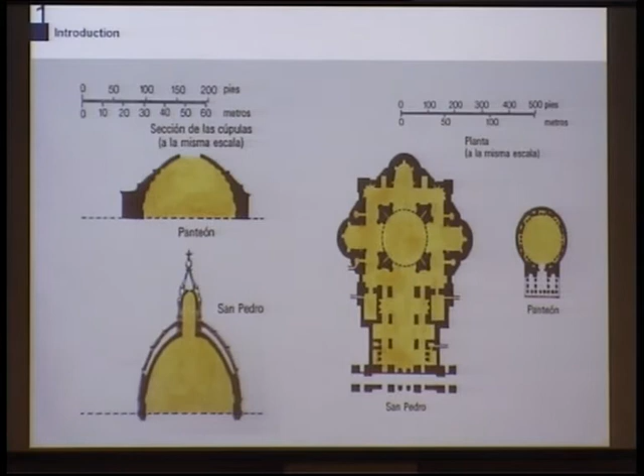Our first SOFiSTiK project was a bridge, a competition in 1989, more than 20 years ago. And we bought SOFiSTiK at that time because we wanted to take advantage of non-linear geometrical calculations, because you know that a bridge like this needs geometrical non-linear analysis. This was the reason why we started working with SOFiSTiK, but I will not tell you about that bridge. It happened many years ago, and now I will show more recent projects.

The first one: he died 2 years ago. He was Oscar Niemeyer, a very well-known architect from Brazil, and I met him when he was 101 years old.

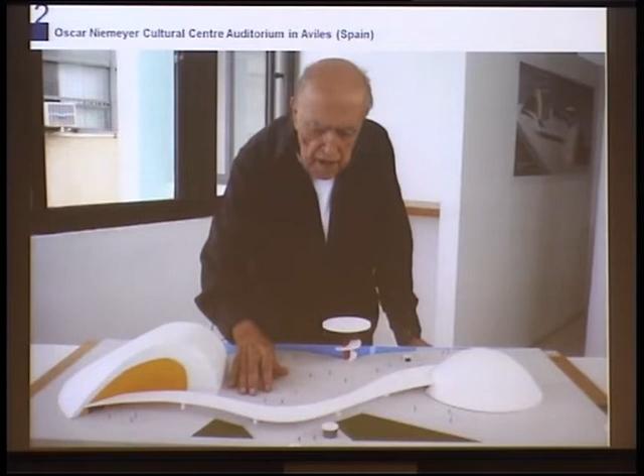I took that picture myself, and I was talking with him, and for me it was very interesting, the interview, the meeting we had, because he had passion to produce, to build, to design, and he had this project, and we were making the structural design of all these buildings.

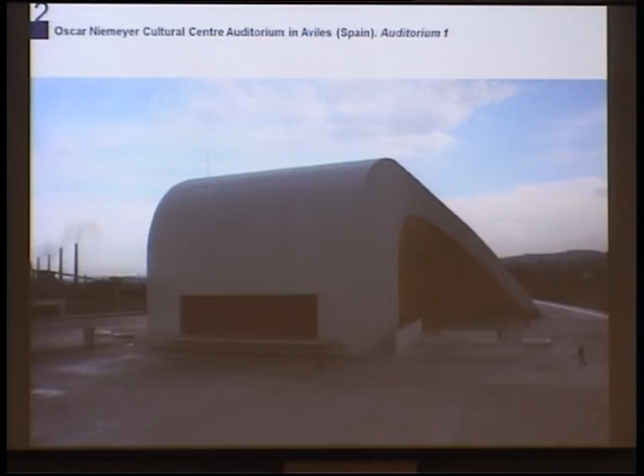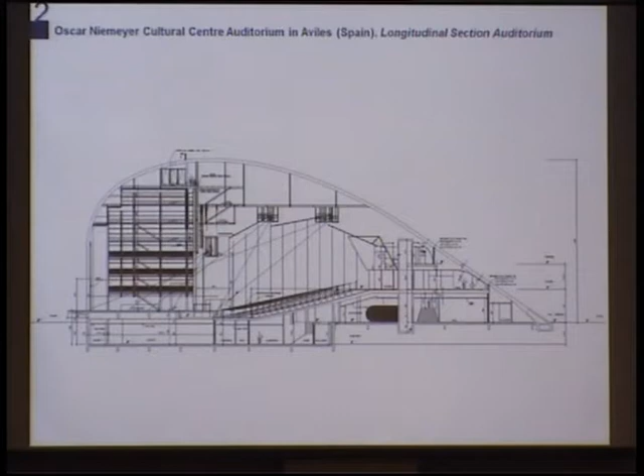Here you have a longitudinal section. I will give you some details, and this is a concrete. It's not a shell, but it is a concrete slab with a shape a little bit strange. And we made this model because we wanted to reproduce the different elements which were not so clear to see from the first contacts with the structure.

And you see we made this complicated model, representing all the different details. And I only want to say that at the end we had some estimations. The calculations we did in this case were linear in concrete, and you know that concrete cracks, and concrete has a non-linear behavior, and you need to pass from stresses or from forces into

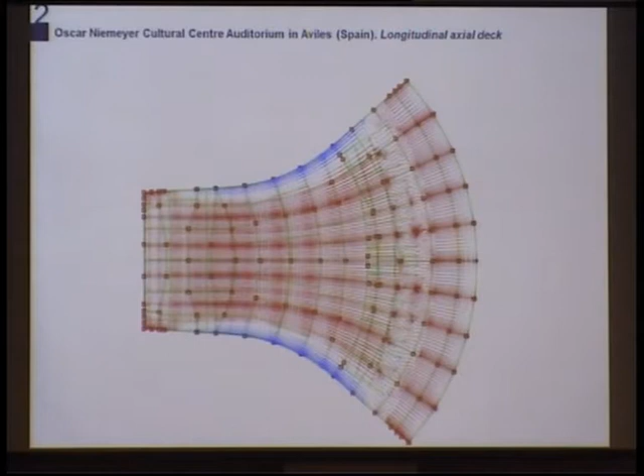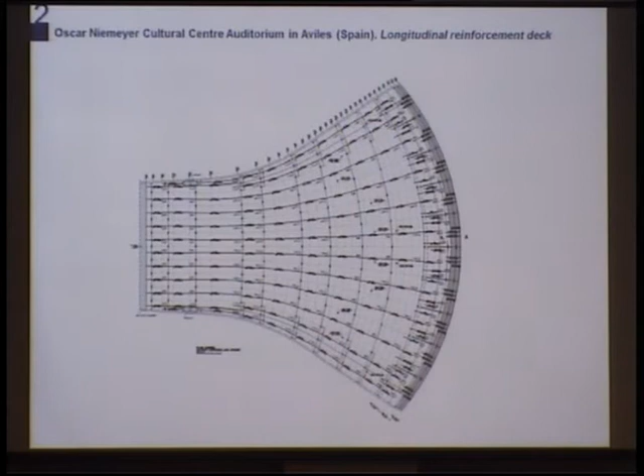reinforcement, and this is not so simple to do, and you have to really have a good way to get the information you can produce with a model like this, and to transform this information into design, into reinforcement, into all the different definitions you need. And here you have the final result, and we will talk about this transformation a little bit later.

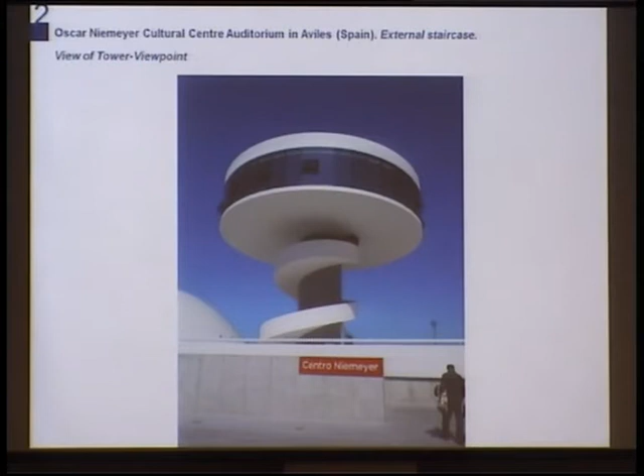And we used also SOFiSTiK for some other models. For example, this element, which is very interesting. Conceptually, it is very well known that this shape is very convenient, and you can take advantage of the shape in order to make good designs. But we wanted also to reproduce this special structure, and here you have the model again and the reality.

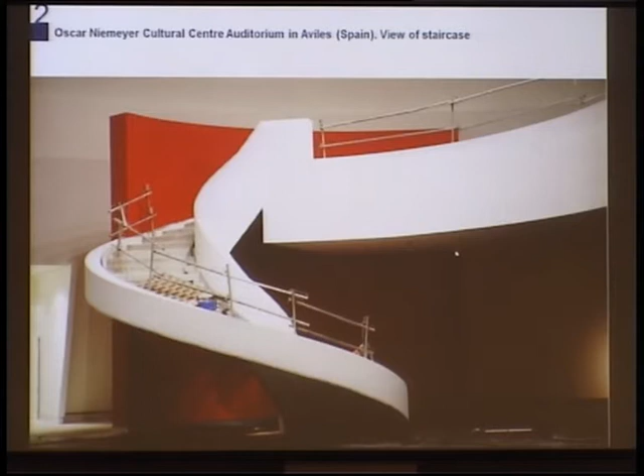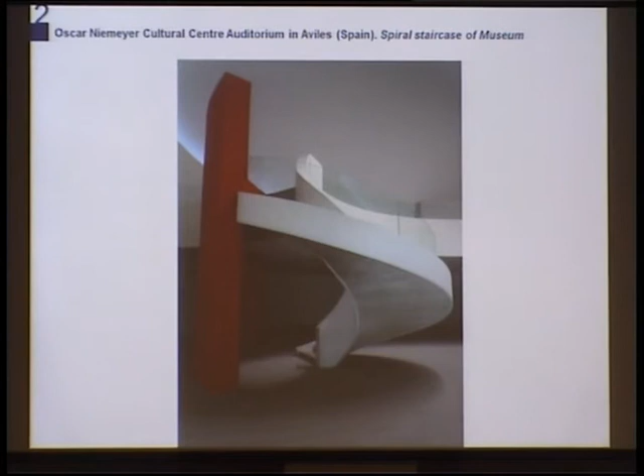Well, so you can use SOFiSTiK in concrete. Here you have another interesting structure. This one, yes, and it's more or less the same concept I showed before. And here you have the model we made in SOFiSTiK. So SOFiSTiK is a good instrument for concrete.

We don't use SOFiSTiK for every type of structure, but we use it for special cases in which we need to combine linear finite elements and shell elements, and we need to really reproduce complicated shapes. And the result is very good. You see, this is very important.

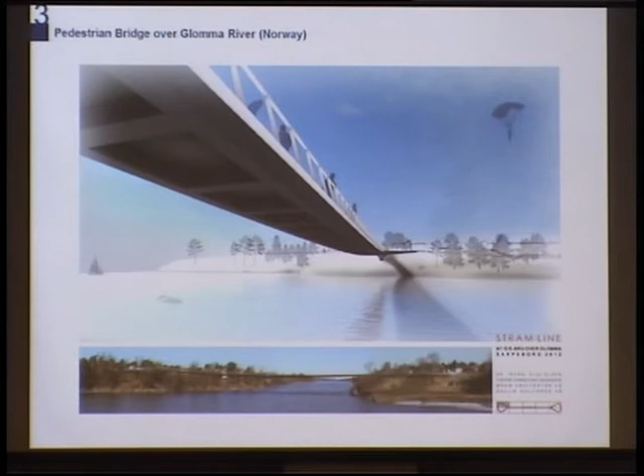This is another completely different problem. This is some information we presented in a competition in Norway. It was a competition for a pedestrian bridge to cross this river, and we won the competition. And these are the ideas we had for the competition. You see that it is a stress ribbon pedestrian bridge, and this was the idea we had.

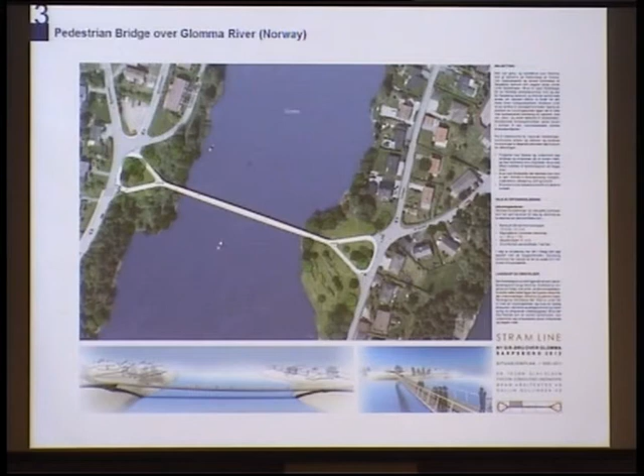But we made many other different proposals, but it is very important to understand well the information and the boundary conditions. And when I went to Norway to visit the place, I realized immediately that this type of solutions, the suspension pedestrian bridge or the arch proposal, were not very good for that pedestrian bridge. So we decided to develop this stress ribbon proposal, and we did that.

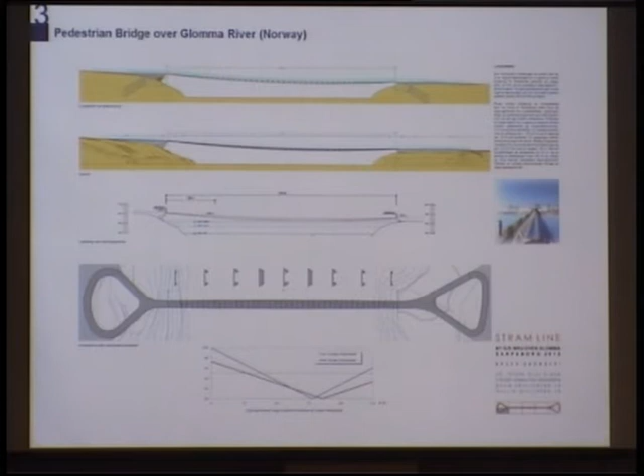The idea was at that time, you know, that if you have this type of structure, you have some problems with the slope for the users of the pedestrian bridge. So for that reason, and here you are not able to see, but you can guess that the depth of the stress ribbon is not constant, it is a little bit variable in order to minimize the impact of the slope. And fortunately, we won this competition.

You see here different pictures. And we needed to make the construction project. And in the construction project, as you probably know, you need to adjust many things, but the final proposal is not so different to the initial one. But we decided to adjust a little bit better the slope evolution of the layout of the stress ribbon proposal, and we decided to abandon the idea of variable depth, and we have now this proposal, which is more typical.

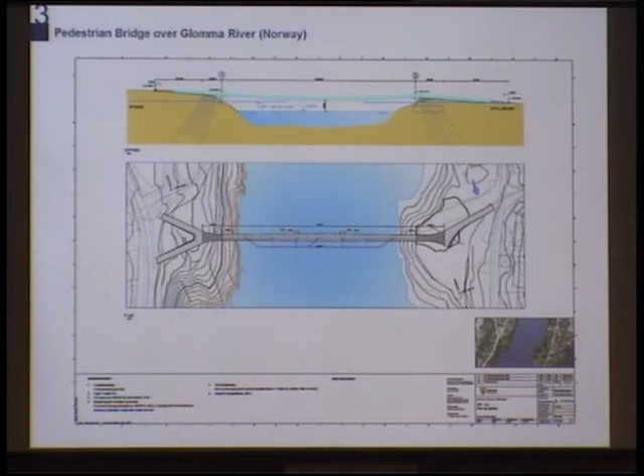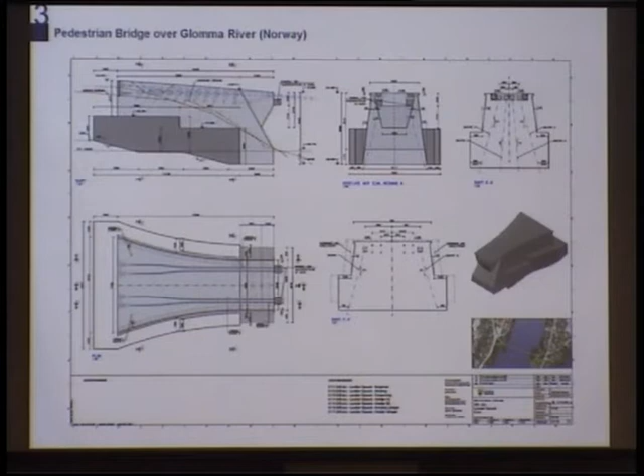So this is a very interesting structure. You need to anchor cables in the abutments, and here you have the definition of the abutments. The abutments are very important elements because you have to get all the forces there. And here you have one abutment, which is anchored to the rock we have in this area, in this area, yes.

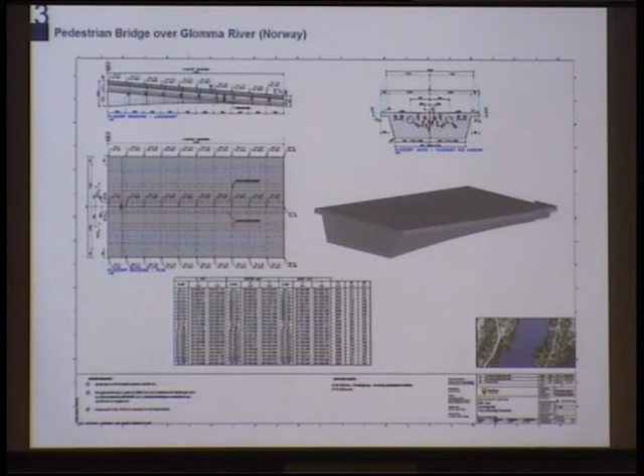And here you have some details. You need to accommodate all the anchor blocks for the anchor elements. And then the first part of the stress ribbon is a little bit thicker.

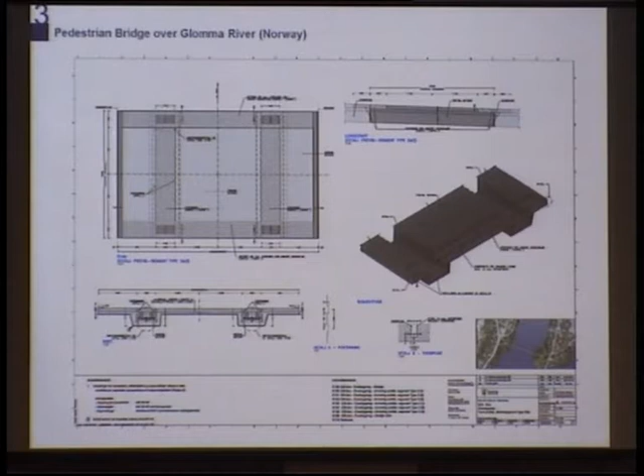And then you have these elements which are constant depth, and you need to install first some cables, the bearing cables, and then you need to install the segments, and then you need to cast these ribs, and then you can pre-stress some additional cables. And this is a very non-linear problem, geometrically non-linear and mechanically non-linear. So from the beginning, we decided to use SOFiSTiK.

And well, I like to show this because after making interesting calculations, you have to produce very good details. And here, this is a local detail of the segments. Here you have the bearing cables you install before the segments, and here you have the pre-stressing cables you pre-stress after casting this part of the segments.

So the construction process is very difficult because you need to build the abutments as indicated in these two steps. And then you need to install the cable with a good geometry, because then you are not allowed to move or to increase forces in cables. And then you install the segments and you produce a big deformation in the cable.

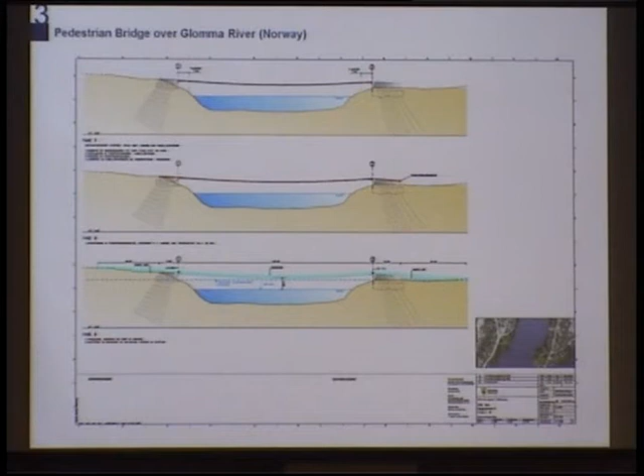You make the continuity between the precast segments and the cables, and then you pre-stress with the second system of cables, and with this pre-stressing you can elevate all the structure. And then you have losses in the pre-stressing, so you have some new deformations, and the temperature, which makes the elongation of this element, and then to take into account the ultimate state, the only elements active are the cables. So here is a summary of the calculation. The model is not so complicated, but the concept is very complicated.

Okay. Now it's better? It's not better? Yes.

Yes. Well, here you see the model. It's simple, and you can see also the forces. I will not explain in detail all these forces. I only want to give you an impression about the model we were using. So the model at first is a cable. You can do that easily by hand to estimate the deformation.

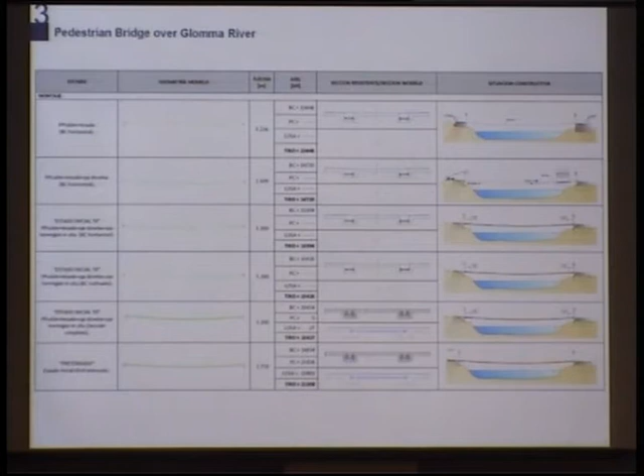But here you see the deformation is very small, 20 centimeters, because here you have only the weight of the bearing cables together with the pre-stressing forces, and the pre-stressing forces are very high, 10,000 kilonewtons. And then you install the precast elements, and you again have the same model, the cable, and due to that load the deformation of the cable will increase up to 2 meters and 70 centimeters. This is a non-linear behavior, but again easy to follow by hand.

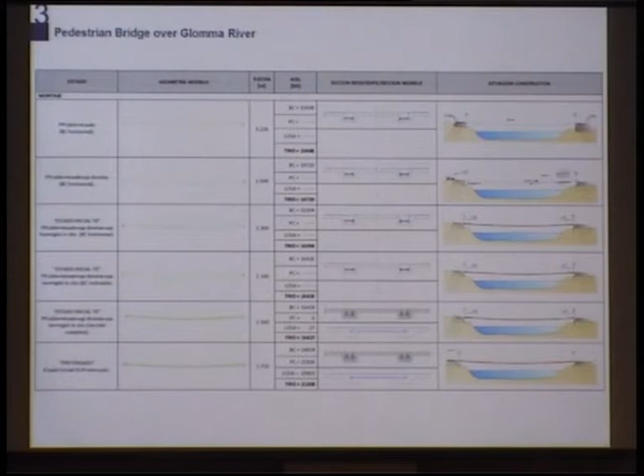And then you cast this part to give a monolithic behavior to the bridge, and you increase the deformation a little bit more, up to 3.3 meters. But when you have the concrete with enough strength, you can introduce the pre-stressing. And this is not so easy to represent with the model, because you have to make some assumptions, and you need to change from a model with cables to another model with a completely different stiffness, because the stiffness in this second situation is that of the whole concrete cross-section.

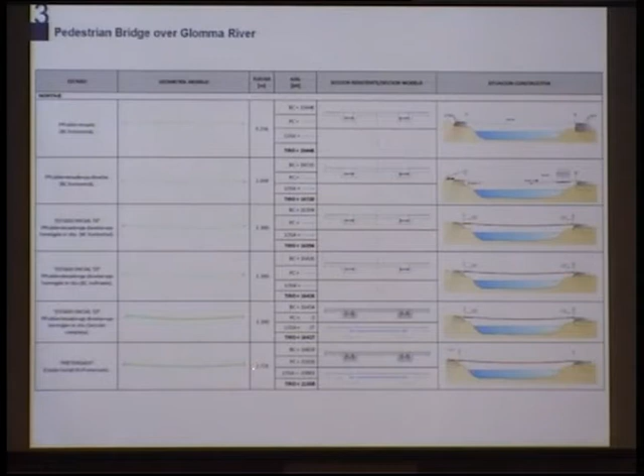So to do that, you need to create a new model, and you need to pre-stress that new model in order to obtain the same deformation. You see here two different models, but the deformation is exactly the same. So you start from the same situation, but with a different stiffness. And then you can work with this second model, in which you introduce the pre-stressing, so you elevate the bridge from 3.3 meters to 2 meters 70 centimeters.

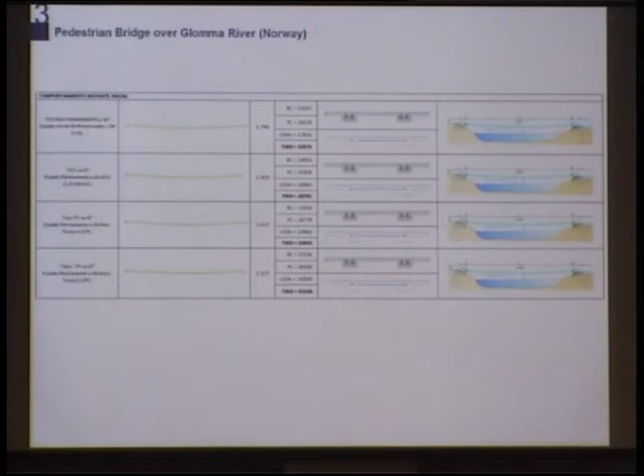And then you need to take into account the losses, and when you have losses, you diminish the forces, and this situation increases the deformation. And also, if you have heating due to the temperature, you increase the length of the pedestrian bridge, and you see that the movement is very important, practically 80 centimeters from the hotter situation to the cooler situation. So you have an interesting movement.

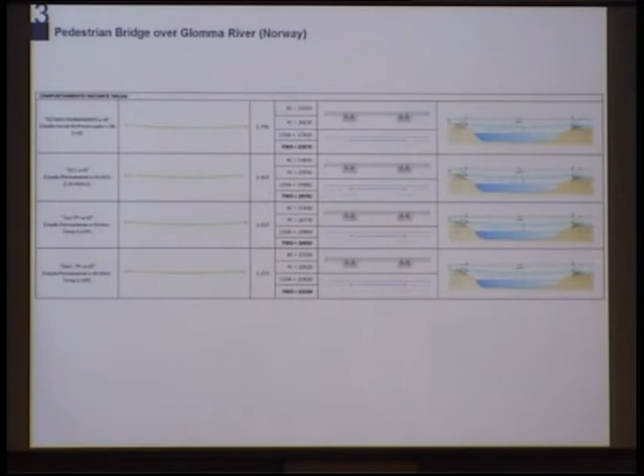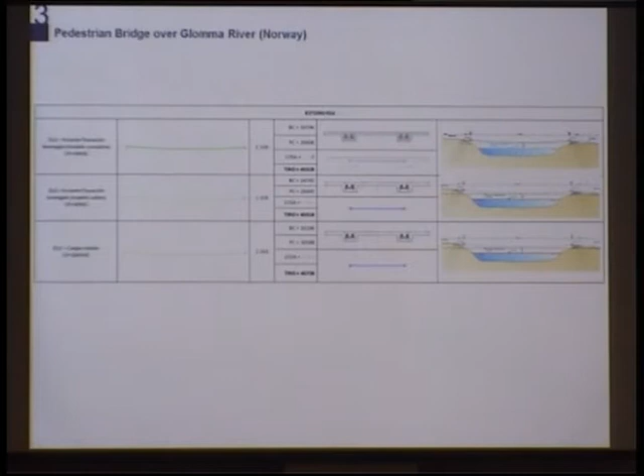And then you have the ultimate limit state, in which you no longer have the contribution of concrete. You have only the steel, and you need to change the model again to take that situation into account. So in order to use a very interesting and powerful program like SOFiSTiK, you need to know well the final result of your model. This is very important. You need to make a big effort to understand. Understanding is the most important, more than having a big model, a nice model, plenty of colors. To understand is the key aspect to really take advantage of a program like SOFiSTiK.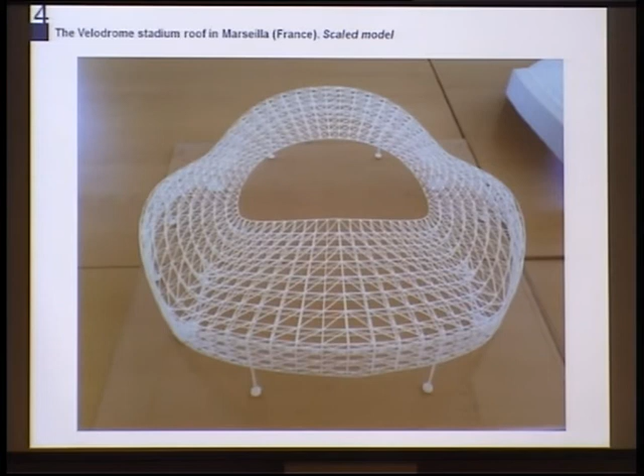I will show you a picture I took personally two weeks ago. The idea was made by architects. We were not able to work with them together to improve and take advantage of the shape, to minimize and optimize the behavior of the structure. But our client is the constructor, and we needed to make a new proposal to optimize the quantities.

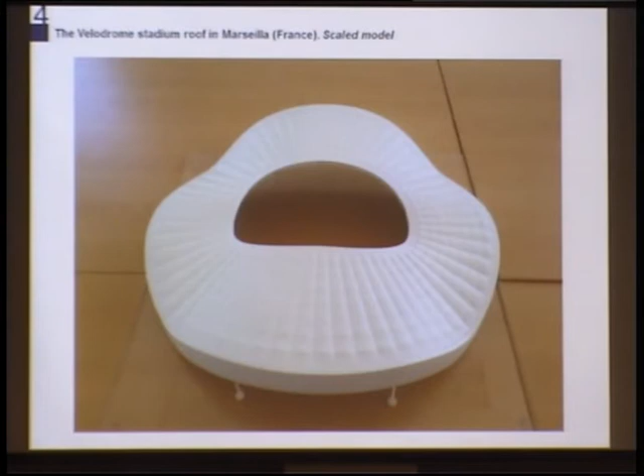So we had ideas first, and then we needed to study carefully the nodes, because according to the codes, the Eurocode, you can make a simplified calculation for a joint like this, made with tubes. But when you use very thin tubes, you could have buckling problems, and in those cases you need to make buckling calculations.

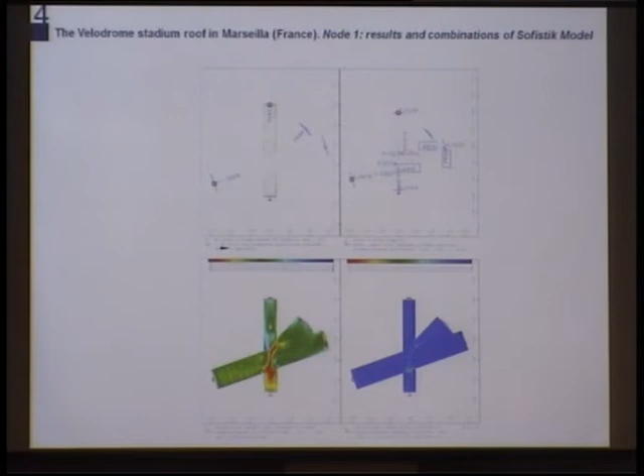We made that type of calculation with SOFiSTiK. You see here the model and the results. We were first making many manual calculations, and then when we had the order of magnitude of the problem, we started using SOFiSTiK to see carefully the details. But it is very important to know the order of magnitude of the results.

Here you have another view of the model and the results, and here you see the reality. Reality is very important. You don't have any more models, you have reality. And this is reality, and another completely different view. If you are really close to the site, you see that models are instruments.

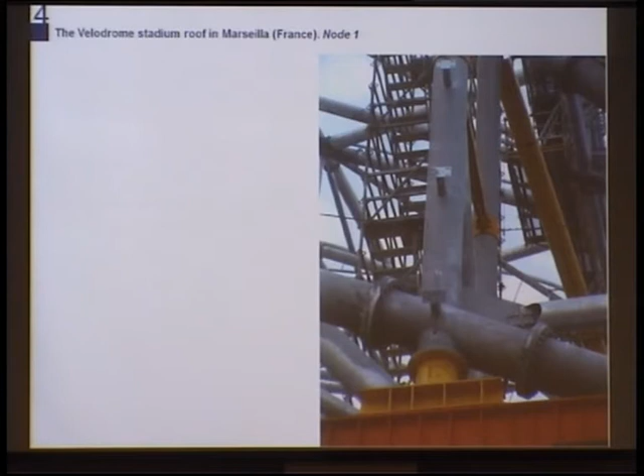But at the end, you have all the responsibility. This roof has a diameter of 250 meters. It's not a small structure. So you need to be sure, and you need to use these tools in a very good way. You need to take advantage of the tools, but at the same time you need not to forget that you are an engineer. You are obliged to understand.

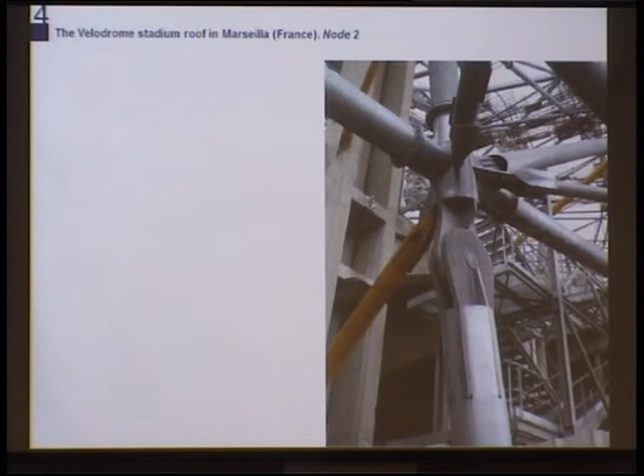It's a very, very complex structure, I can say you. I was suffering for more than one year. It's almost finished now, and you smile, but during the process the system is completely different. I would like to show you that these are all the calculations made by hand, and then there were the estimations. We had first all these estimations before starting working with the model.

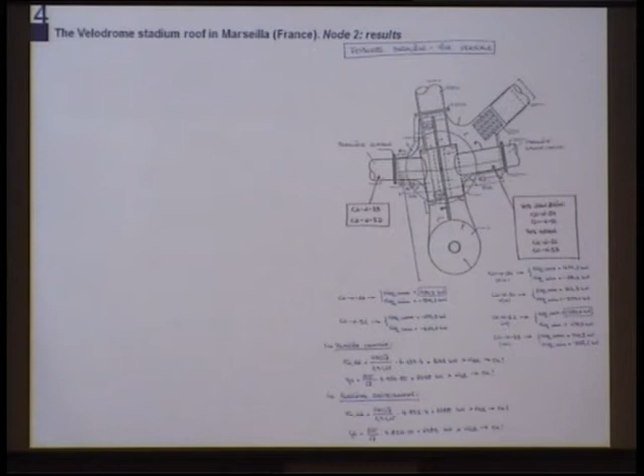Here you have the model again, and again. I like very much to make these hand calculations, and the model again, and reality. And reality is complex, a very, very complex structure. SOFiSTiK was very useful to analyze this special problem, buckling, local buckling, and allowed us to save a lot of money because we were able to use very thin tubes to solve this complex problem.

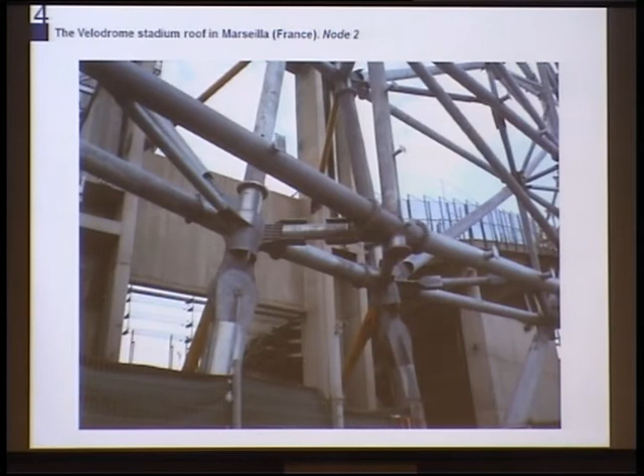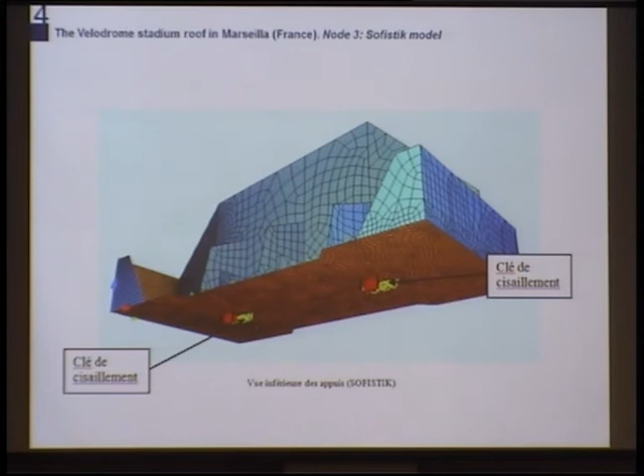So this is another example. You see the scale of the details, to give you one idea. I will pass quickly because I want to have time to show you the star of our project with SOFiSTiK.

Well, there was another complication because we needed to build this roof while at the same time they were using the field every 15 days. We needed to prepare a report to say you are able to play the next game here.

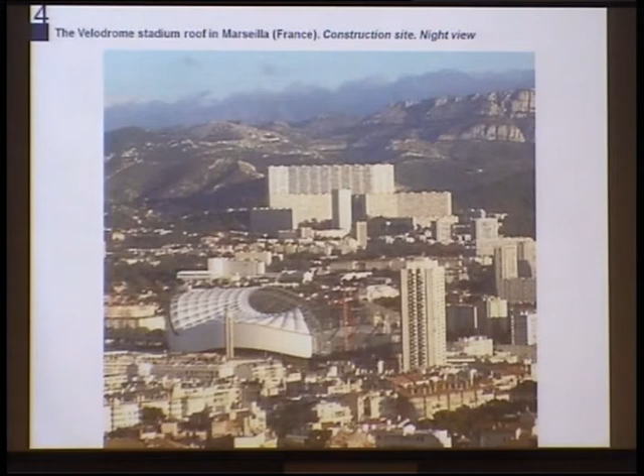This picture was taken by myself two weeks ago in Marseille. So we are practically at the end. Now we are very happy, we can smile, but you suffer a lot when you do things like that.

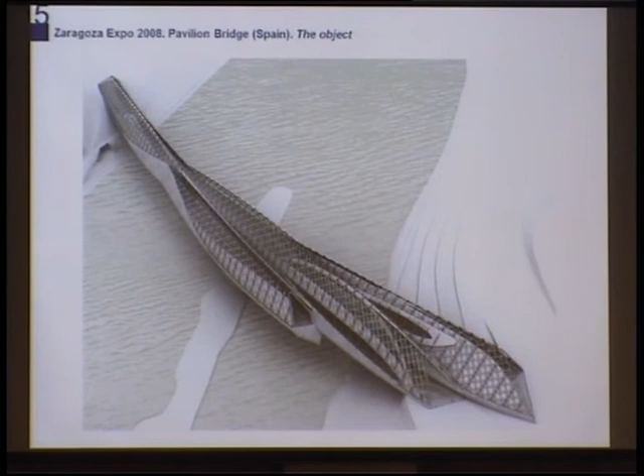I would like to finish my presentation with this last project. This was an interesting structure: it's a pedestrian bridge, but at the same time it's a building because it's an exposition area. So you enter, you cross the river, and you can see some exhibitions here. This was built in Zaragoza, in my country, in 2008.

The winner of this competition was a very well-known architect, Zaha Hadid, and this was her idea. She is a very good architect, but a very difficult one. You see the definition of the bridge was this one, we had only that definition. Many cross-sections coming from Rhino.

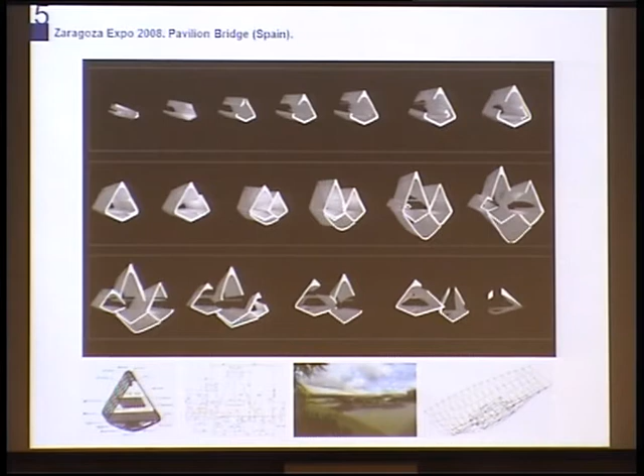Rhino is a 3D CAD program, and they can do everything with Rhino, but then you need to make this structure possible. Here you have another picture of the model. We participated in that competition too, and this was our proposal.

Unfortunately, we lost. But it is very interesting to lose, because in many occasions when you lose, you learn, and if you learn, you have opportunities for the next one. So this one was our proposal. I will not explain it in detail.

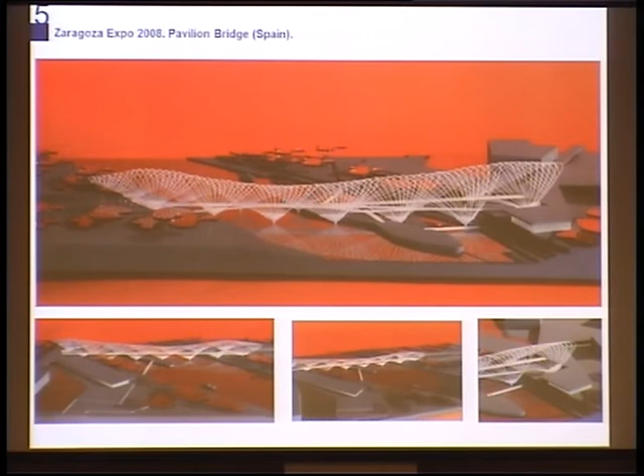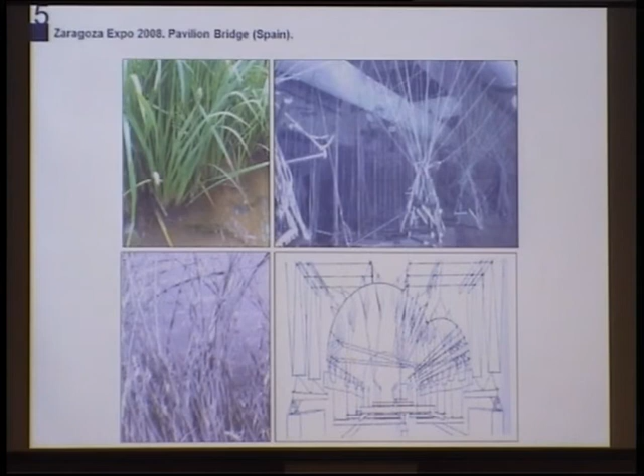We worked with Richard Rogers, and we had some initial ideas from classical buildings and structural ideas. I will not explain in detail, but at the end we made a proposal and Zaha won. We had our second opportunity because there was another competition for the construction of the building, and we had the opportunity to improve the structural design.

During that competition, the construction competition, I was practically one month thinking about the behavior of this very strange structure. So I made all these sketches.

I have a blue notebook, not this one. I have this one, and I made all my calculations here. I like to do all my calculations here. It's square, because engineers are a little bit square. It's blue, because we can make elegant. And it has some movement, because we are thinking all the time.

So many good ideas behind the notebook. Well, I started thinking what to make possible this strange structure. And I thought, well, this is a beam, a very strange beam with two spans, 125 meters one, and 150 the other one. And you can think that the behavior is like this.

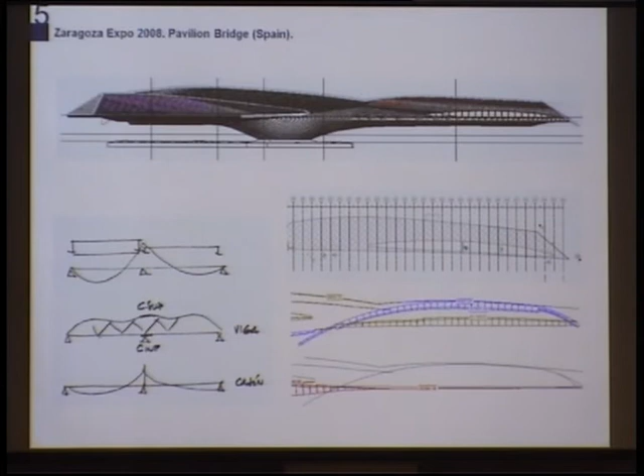And I thought, well, we have some elements on the top of the building, and I will use this as structural, and I will also use this mesh to pass the shear forces from the bottom chord to the top chord. And well, we started working in this direction.

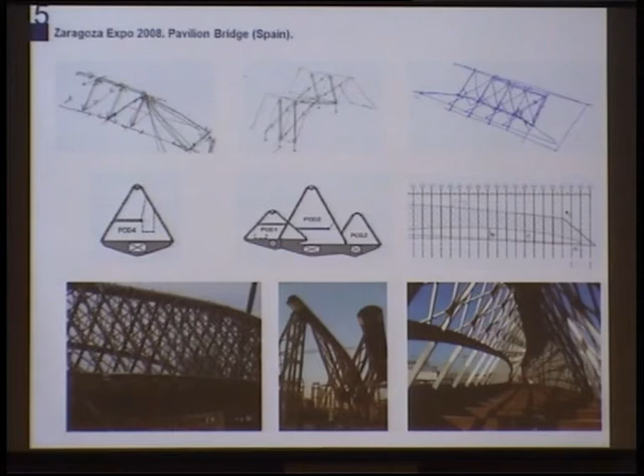And you see that every single idea was checked with the strut and tie models, in order to represent this very complex structure. So we needed to use again SOFiSTiK, because SOFiSTiK is our program for very difficult problems, I can say.

So you see here we have this bottom box, steel box, and then we have this top chords, and we have this connection between the top chord and the bottom chord, and we made many different models. Here you have the model we did with SOFiSTiK.

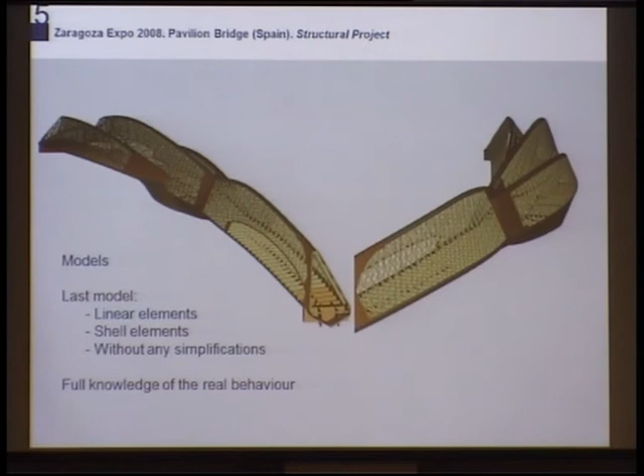It was very realistic, but the model was done after understanding the problem. It's very important to understand the problem with simple calculations. Otherwise you don't have any control. We like also to make calculation, we do simple calculations, we understand the flow of forces, and this is very important. When you know the flow of forces, at the end you know more or less the order of magnitude.

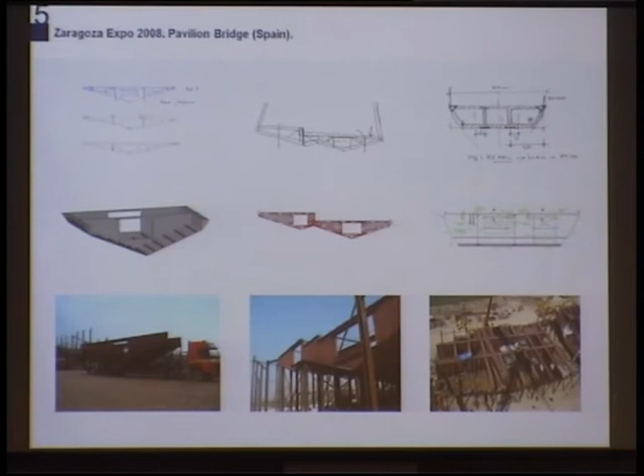And then you can check with more sophisticated models, and you have reality again. You need to do things to reach this level. And here you have the model we needed to reproduce.

It was not, we were not able to reproduce all the details. We needed to make previous models in order to see how to simplify the general model.

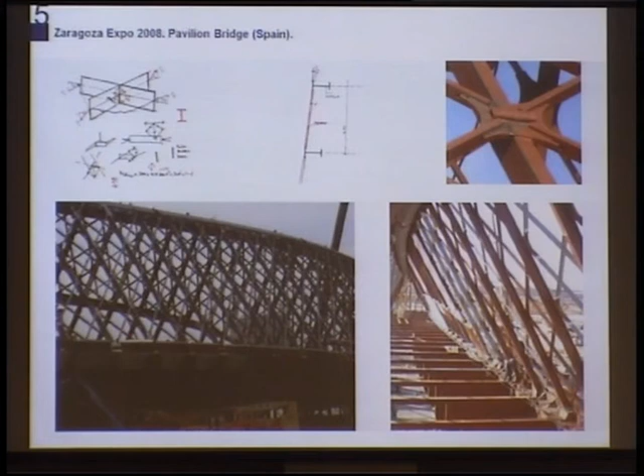I want to make clear that before the models, we need ideas. Ideas are very important, and well, this is a very good example. We started with the ideas, and then we made a 2D proposal, and then we started checking these 2D proposals with 3D because the problem was so complex. It is not possible to imagine that you are making a good assumption only with one node, and then we needed to produce our proposal and then reality.

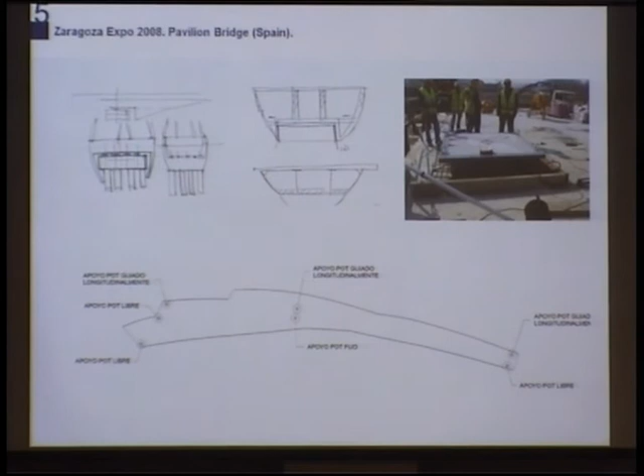And we made many different small models in order to understand the behavior of these nodes well. And at the end, these are from my notebook, not this one, because I have a lot, but the books I had in 2007.

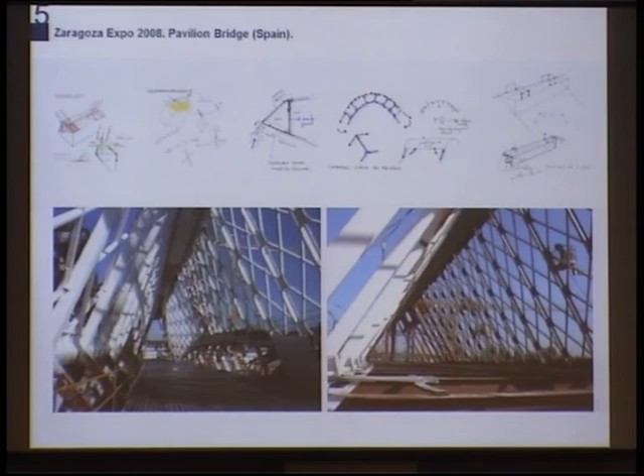But at the end, you see that we had many different models. These are local models to analyze the behavior of this node, in which you have the main chord, top chord, and then it's divided into two legs, and the shape is completely strange, and so on. But at the end, this is the diaphragm for the abutment. I studied in Stuttgart 40 years ago, and I learned and understood this model well, so I am using strut and tie all the time, not only for concrete, also for steel.

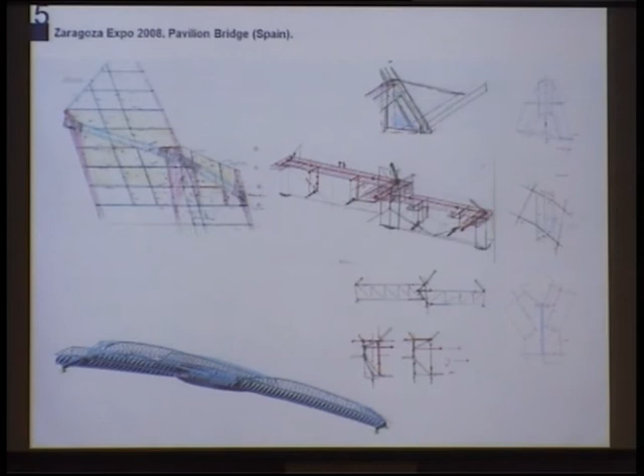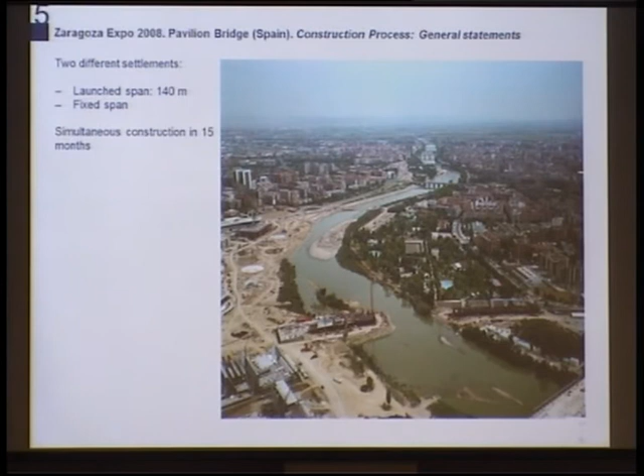Well, but at the end, we needed to build this bridge, and here you have the river, and here we need a temporary peninsula. We built the more complicated, geometrically more complicated part here, and we needed to build the second span here and launch. The geometry of this bridge was so complicated, so we needed to do that in a very complicated way.

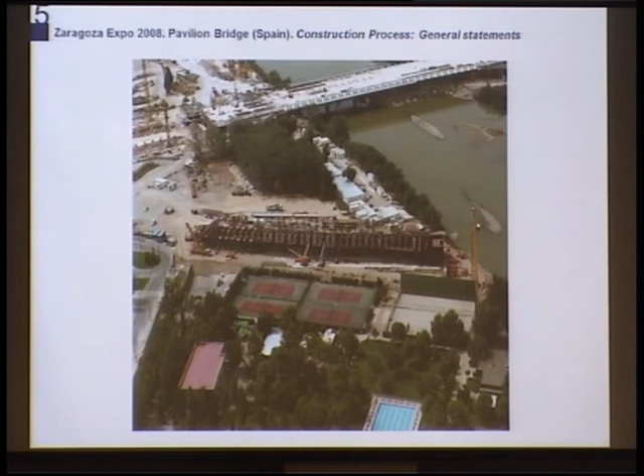And we were building this part, and here you have some pictures, and here you have the position of the part we were building outside of the river.

At the end, we needed to launch. And this process is very complicated. First, we needed to know the center of gravity of this part, and it's impossible to imagine where is the center of gravity of that part.

And for doing that, you need to have a good model. You need to represent all the details in a good way in order to estimate the weights in a good way. And this was our first commitment for this model.

And then we needed to support the bridge because the way of the launching was straight, but the bridge was not straight. So we needed to support the bridge with some auxiliary elements. You see these beams, and you needed to change the position of these legs every step.

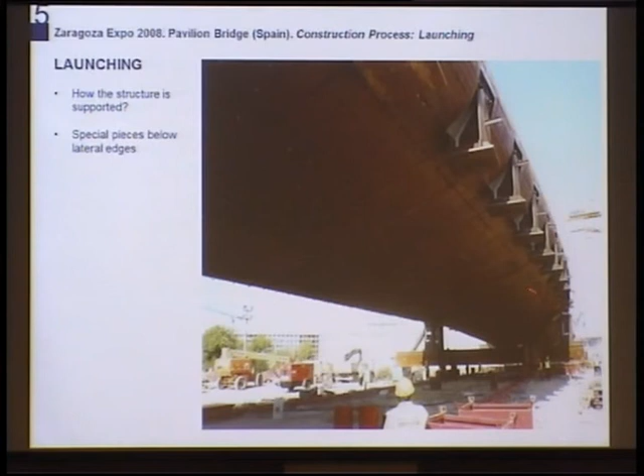And here you have one picture in which you see the situation at the beginning of the launching, where we measure the weight and the center of gravity, and this was an important moment. After seeing that our mistake was 80 centimeters, we want to celebrate with a good bottle of Spanish wine.

Because 80 centimeters in a bridge like this is a very accurate calculation, really. We need to know that... It's finished. 3 minutes. Okay, I will finish.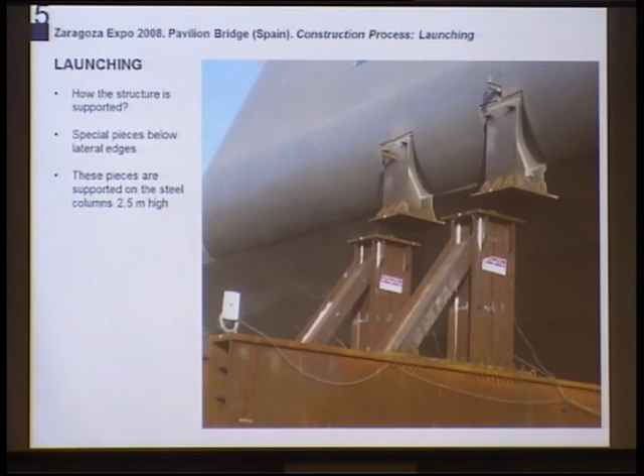I want to say that we took advantage of these legs in order to measure the forces we had in every step. We were monitoring the process all the time with this simple instrumentation. This is very important, to have good ideas to make simpler things.

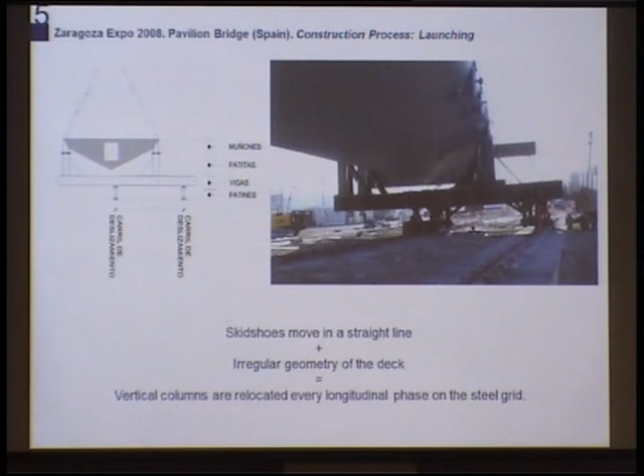And well, at the end, you see here how difficult it was to support the bridge in this position. At the beginning it was in a completely different situation. I will show you quickly, because I have only 3 minutes, even less, 2 minutes.

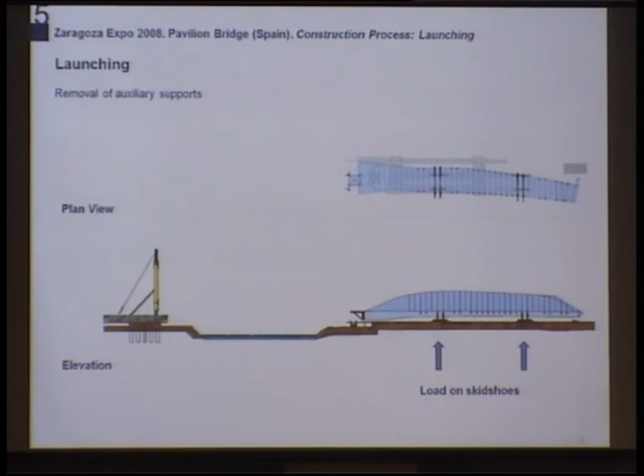The bridge was supported in many places, and then we took the load with the jacks, and then we started the launching. Then we had it in this position, but we needed to move the bridge laterally in this direction too, because we had some installations, very expensive installations, we were not able to use, so we needed to make the problem more complicated.

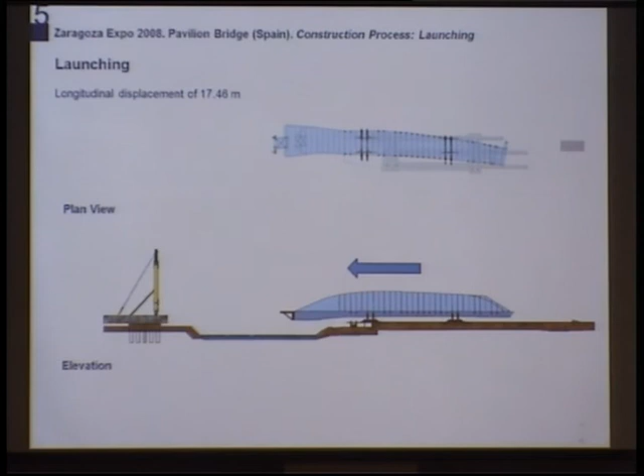And we continue. It is very interesting. At a certain moment we were not able to continue with the same system, so we needed to install this stay. This one was to retain the launching, and this one was to support it.

This is very important, because if you lose force here, you increase the forces in this part of the bridge. But if the load handled by the cable is too much, you decrease the load here, so you don't have a problem in this area, but you have a problem in that area. So we needed to really follow the process.

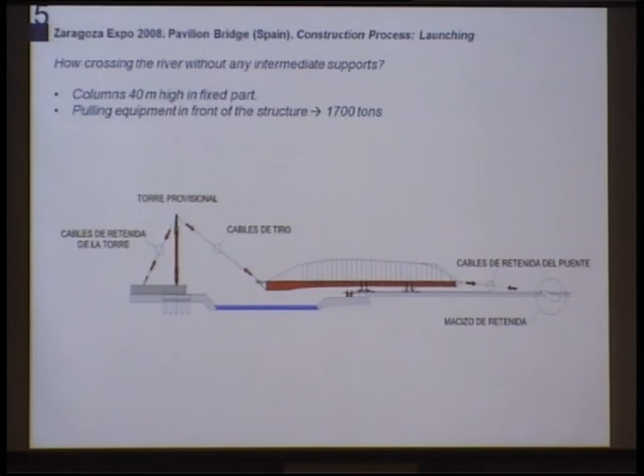Here you have the temporary pylon, 40 meters high, and these are the back cables, and this was the direction of the launching. I like this picture because you can see the real geometry, which was very complicated, and we needed to launch the bridge along this line.

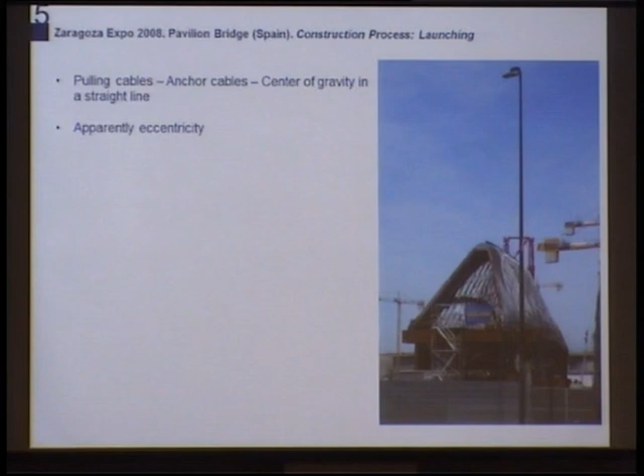And well, you see, we were able to do that. You can follow the process a little bit. We made this launching in one month, and we were suffering. It was very, very, very difficult.

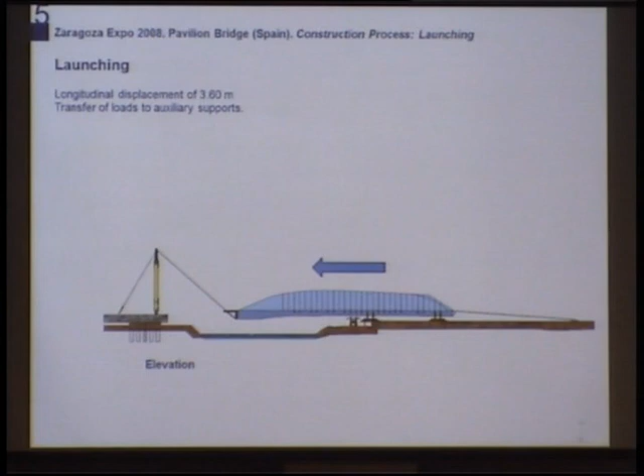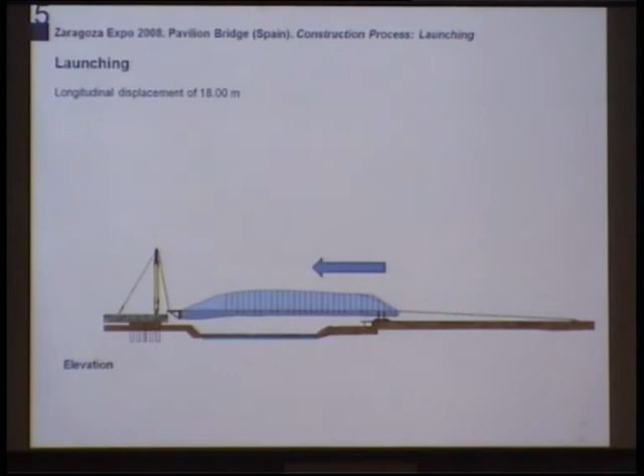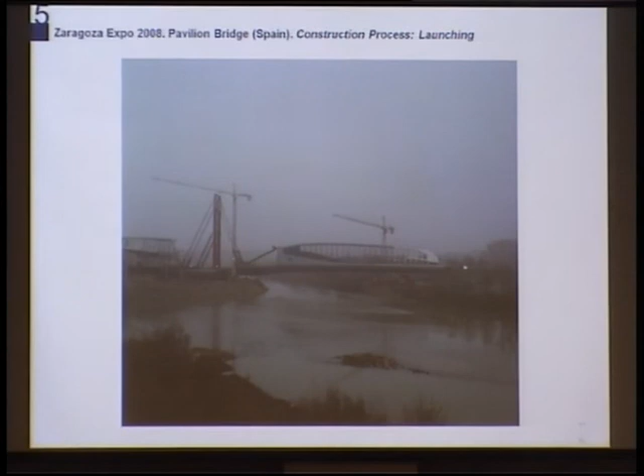And here again, SOFiSTiK, because SOFiSTiK was the program we used to study each position of the launching. Then at the end we needed to join these two different parts, and add all the connections, and the connections were not so simple because we started connecting the bottom part and then the top part.

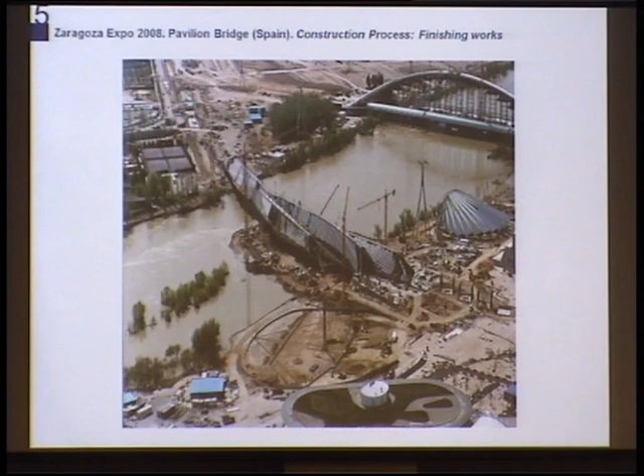So SOFiSTiK was very useful for this very complicated project. And here you see the final pictures.

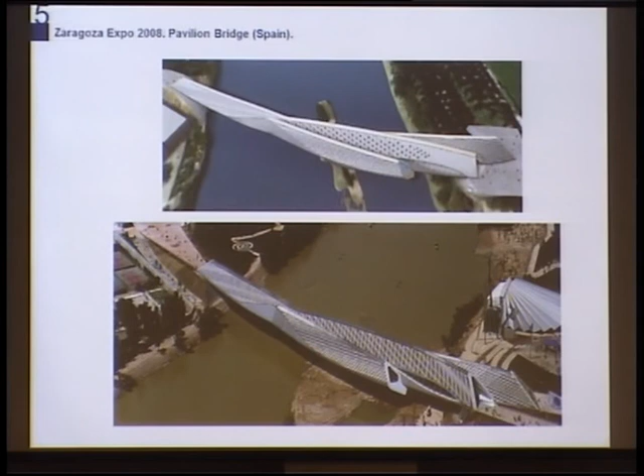And here you see how Zaha wanted her bridge during the competition, and how similar the reality is. And here you have again our SOFiSTiK model compared with the reality, which is close.

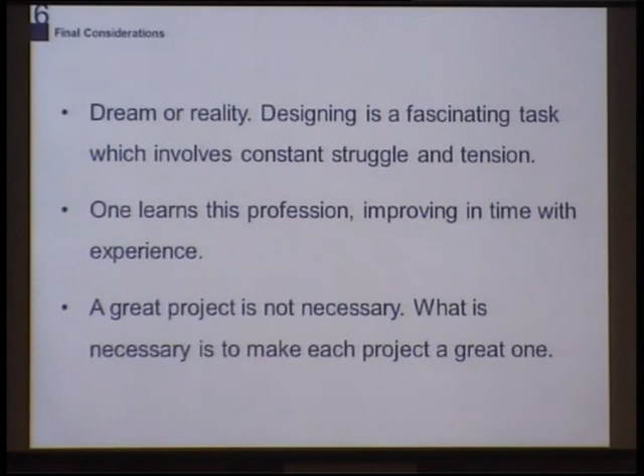And well, I am finishing. This is my last point, but let me say two things. It is very fascinating to design, but you need to suffer a little bit, and you need to understand a lot. Understand, and understand. And you learn this profession with experience.

You need not to lose any opportunity, even if the project is a simple one. You need to take advantage. For that reason, for me, it's not necessary to have a big, important and complex project. We need to make from each project a great project. Thank you very much.